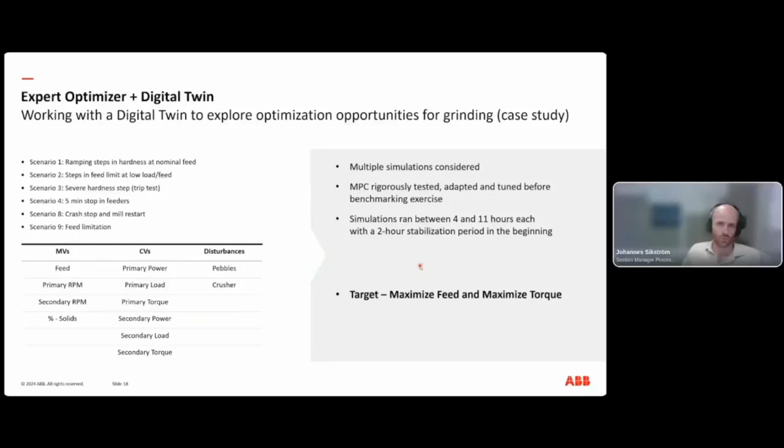Hello everyone, welcome to the ABB Process Performance webinar on Pushing Constraints in Mining with ABB Ability Expert Optimizer. This webinar will focus on the technology of advanced process control and how it brings value in terms of process optimization in the mining industry.

We are also joined by special guest speaker Johannes Sikstrom from Boliden, based in Sweden. He talks about their two recent projects: first, using a digital twin to evaluate advanced process control under multiple operating scenarios on one of their grinding circuits, and then secondly, the on-site implementation of advanced process control and the observed benefits.

Mining is a harsh, changing and challenging environment to optimize. So how can technologies like advanced process control be used to add value? Boliden have collaborated with ABB in such an approach to target the optimization of their grinding circuits in Sweden.

I'll start by going over the basics of advanced process control - in essence, an autopilot for driving the plant to an optimum operating state. With advanced process control, it's seen as a secondary level solution that resides on top of the plant's control system, whether that's a DCS or PLC.

Advanced process control, APC, is an umbrella term in industry which comprises several technologies: model predictive control, fuzzy logic, and inferentials used to predict states in the process. I'll talk about these in the following slide.

Basically, it's an autopilot that manipulates actuators and PID loops in the control system to first stabilize the process. Once the process is stabilized, then shift this process either higher or lower based on the economic optimum for process optimization. So if this is density or particle size, we're looking at stabilizing and then shifting it - if it's density, normally closer to an operating upper limit in a mill to minimize steel-on-steel contact, as an example.

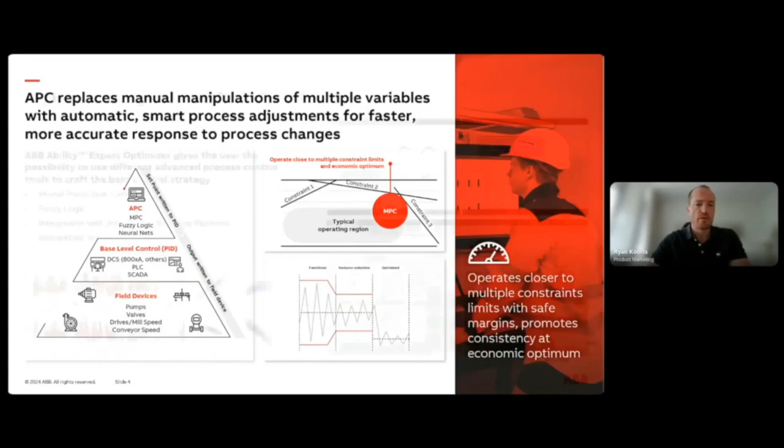When it comes to the different technologies for advanced process control, one of the most common ones would be model predictive control. MPC uses dynamic models obtained empirically from process data, and uses the current state and historic states to predict the future of a particular variable, such as oxygen, pressure, grind size, etc., and then how far away that prediction is from target, and what control actions are required to reduce the delta between target and current value.

MPC is very good at tackling units with challenging dynamics, whether it's systems with large delays or high complexity of interactions with multiple inputs and outputs.

Fuzzy logic is a tool commonly used as well in industry, especially in mining. It's been around for a couple of decades now. It's more of a rule-based approach, easier to understand from an operator perspective, but becomes a bit more challenging when it comes to tuning units with challenging dynamics.

You also have the ability to introduce inferentials into your advanced process control setup, where inferentials are predicting and inferring states of the process in between updates. These states are normally infrequently measured, such as particle size, if it's manually sampled, or density.

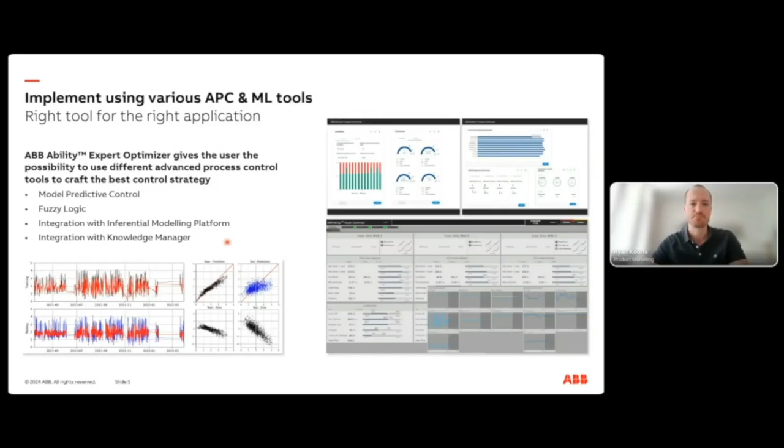One of the challenges when it comes to optimizing minerals processing units, more specifically grinding optimization, would be the instrumentation element. The ability to connect any new device, giving additional information on the process, is critical for progression towards autonomous mining optimization. The idea being that the more eyes we have on the circuit, the easier it will be to drive it to an optimum.

With grinding, one example could be cascade monitoring, which helps to answer questions such as: what's my current shoulder and toe angles within the mill? Am I operating at maximum grinding efficiency? And are my current states causing excess liner wear within the mill? So a solution that provides this information as additional variables can be used and included inside an advanced process control application.

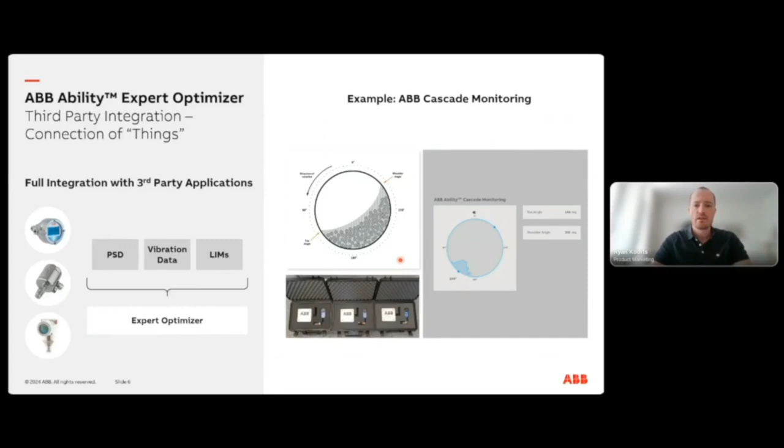When it comes to mining optimization, ABB's been leveraging advanced process control technologies to improve operations from the mine through to the port. If we start at the mine, ventilation on demand utilizes model predictive control to optimize air flows underground, ultimately reducing energy consumption, as air flows underground are highly non-linear and interacting depending on the level underground, as well as slow and complex dynamics.

When we move to the concentrator, we have minerals applications such as grinding, looking to maximize throughput and minimize specific energy. Flotation looks to maximize recovery and minimize reagents. And then with thickeners and clarification, we look to stabilize the bed mass and the underflow density, whether that underflow density is through to leaching or additional fine milling. The underflow density plays an important part, and if that's varying significantly, then your downstream processes will be performing suboptimally.

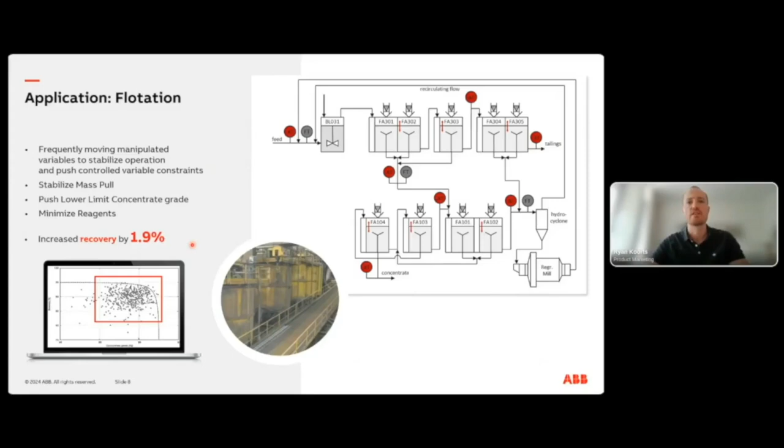By applying advanced process control to flotation, typical benefits would be a 1 to 2% increase in recovery, whilst at the same time reducing the specific consumption of your xanthates, frothers, etc. by 10, 20, 30% in some cases.

Another application would be clarification or thickeners. Thickeners have very slow dynamics, where MPC is very good at handling these types of challenges, as opposed to a human operator with a shorter time frame for attention or concentration. So MPCs can be applied here fairly well, utilizing handles such as flocculant dosing and the underflow drive of your pump, with goals of reducing overdosing of flocculant, maintaining stable underflow density to downstream units, and potentially reducing wear on the rake within the thickener.

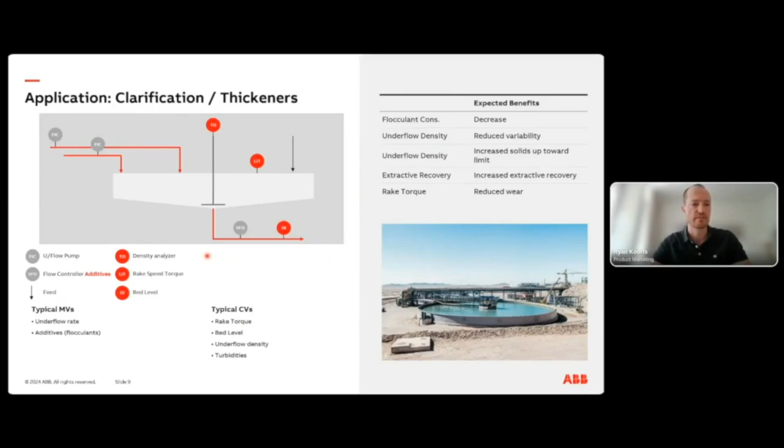So moving on, we are joined by Johannes Sikstrom from Boliden. Johannes is Head of Section Process Control and Analysis at Boliden System Technology, and was heavily involved with both the digital twin evaluation of advanced process control and the on-site implementation of the advanced process control projects. He will discuss both the projects and why they chose advanced process control for increasing grinding performance. This is pre-recorded, so he will jump right into it.

Thank you. I will talk today about a series of projects that we have done together with ABB regarding advanced process control. First, we investigated how we can motivate investment in these kinds of technologies, and then we also implemented it, but I will get into that. The first step of this series of projects was really proving the technology - proving that APC and advanced process control can bring value to Boliden's processes. This was done with simulations.

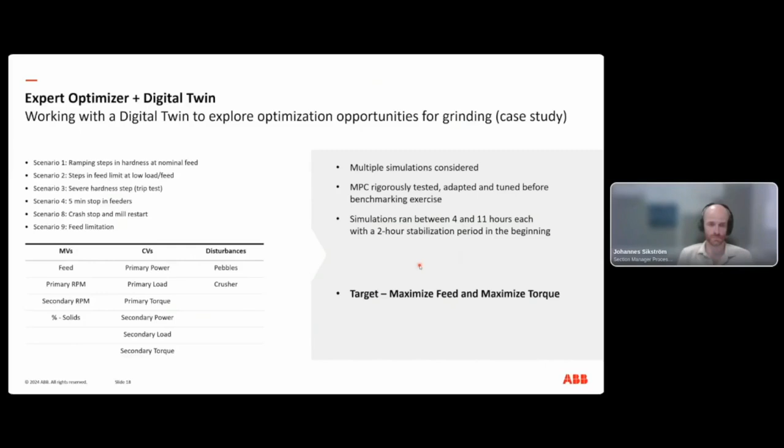Due to this, you need set points for these controllers with a difference between them, and this creates a gap where we can't really get the performance out of it. An APC knows about both the torque and the load, and a lot of other stuff, at the same time, and can balance them all to the optimum instead of these interactions being a problem.

This is one of the main reasons we saw that, even though our PID strategy is quite good performing already, due to these limitations in the technology itself, we were not able to really get that last bit of performance. That's one of the main reasons we were interested in moving to advanced process control.

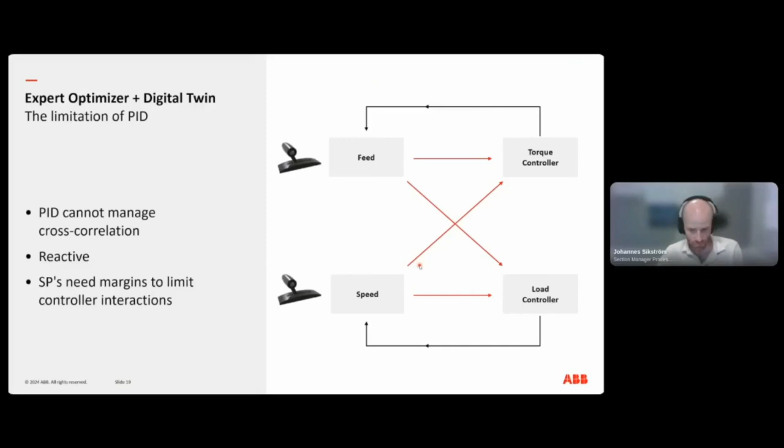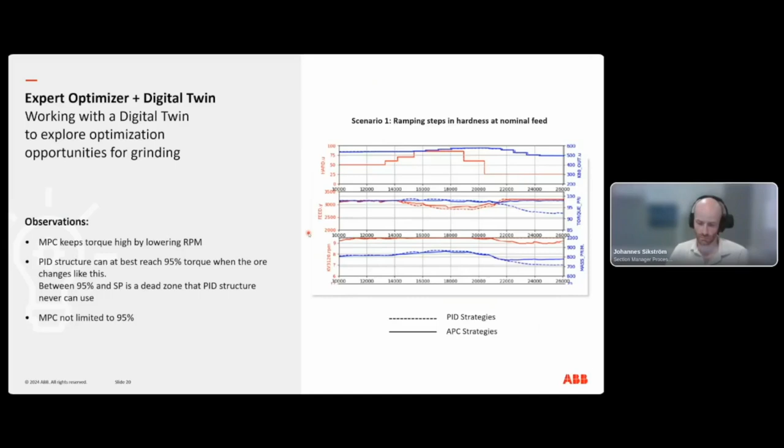Here we can see in the benchmark that it works like we hoped, let's say. And one more case.

I'm not going to go through all of these scenarios, but you get the idea. There were some scenarios, like a short stop of 5 to 10 minutes, where the APC was pretty similar to the PID - it wasn't better, but it wasn't worse. But these were the big ones where we saw it could really use more of the installed power.

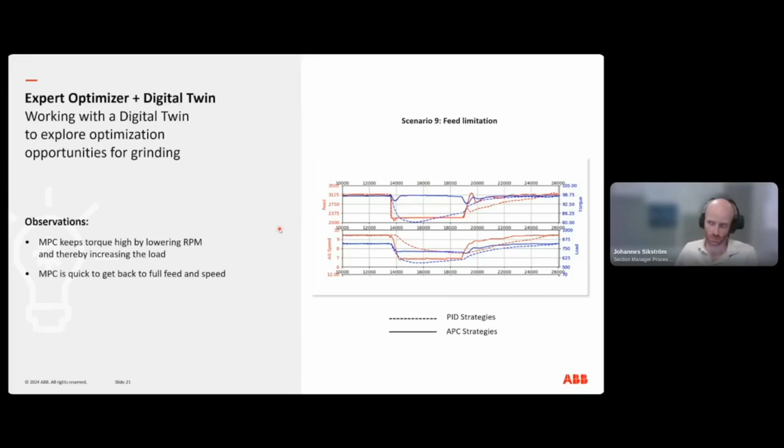And so in summary, we saw that it could handle the cross correlation of variables and better utilize the torque. We also saw that it had a bit higher throughput because it was faster to get the throughput back up after it had been reduced.

And the last point here is quite important as well, because in a PID, you typically don't have any constraints management. The PID doesn't know about constraints, it only knows about the value, the set point, and how far it's between them. But since in an APC you can be aware of the constraints and act really aggressively once you are close to an important constraint, we saw that we could potentially have a higher set point in normal operation because the disturbance reaction was a bit stronger to act once it was really needed.

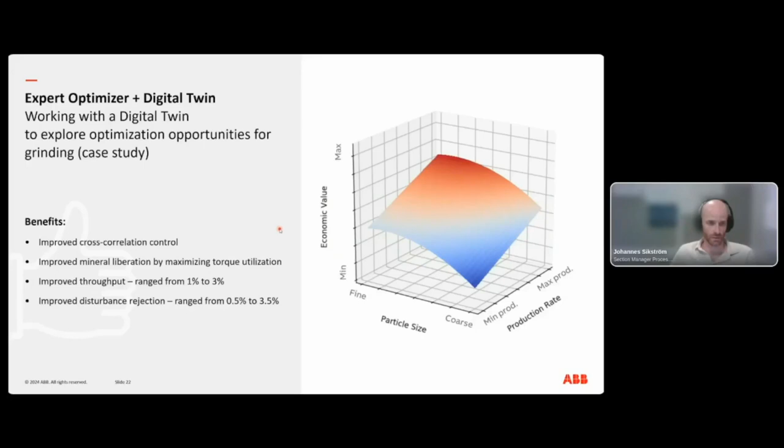So we were really happy with this and presented it to our sites, and Garpenberg, one of our sites in Sweden, in the middle part of Sweden, was interested in moving forward with the implementation, which we then did.

And Garpenberg, there has been mining there for a really, really long time, from 400 BC. So it's an old mining region, and it's a mixed ore, but the main value comes from zinc and silver.

And they have a grinding circuit with 2 AG mills, one 5 megawatt primary mill and one 2.5 secondary mill.

Like I said before, the ultimate goal is to maximize the liberation, to have a good recovery. And we do that by having a high power utilization. But we want to achieve that utilization through a high feed or high throughput, of course. Stability downstream, so the stability in flotation, is also a very important part in this.

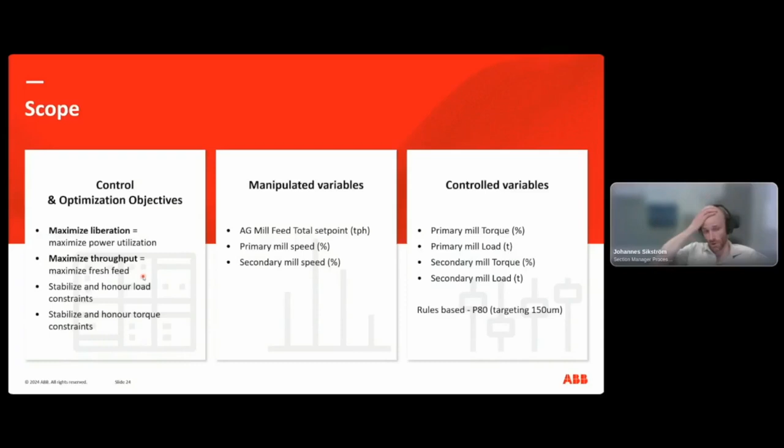And we know that MPC has this predictive capability to look ahead, and that can bring additional stability because it doesn't need to violently react, but it can predict and think ahead a bit, which is good. And of course, constraints both on the torque load and some other constraints.

What we're manipulating is the set point for the feed, and then the speed of both the primary and secondary mill. We also have a pebble gate which feeds pebbles to the secondary mill, but that is currently operating at 100% almost all the time, so it's not really something we control that much.

But if the torque gets too high, the gate can be stopped or reduced. We actually left that to the normal PID controller, so that was not included in the APC because there really was no need.

But we were controlling the torque and the load of both mills, and we also have size distribution measurements for what is going to flotation that we are interested in keeping in a certain range due to the paste backfill production. They have some quality demands there that we have some rules that go in and help us maintain that range.

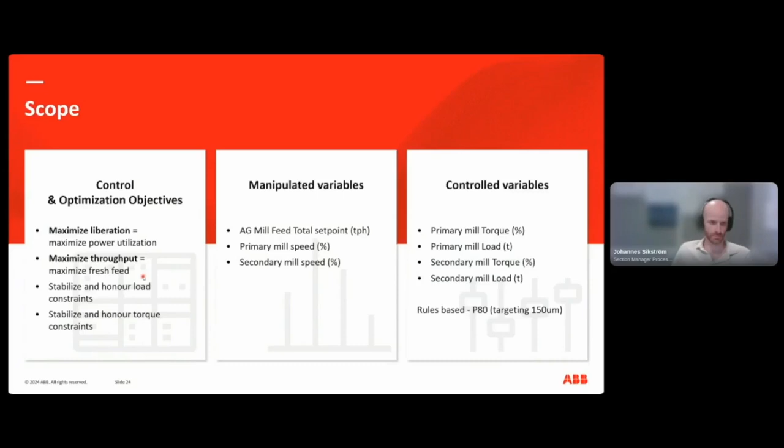So what did we end up building then? It became a bit of a hybrid in the end. It was very difficult to get everything into a single MPC control model. Particularly the speed was difficult to describe fully in a linear model.

So we have an MPC part covering the feed to torque relation, and then we have some fuzzy logic for the speed part. We also built a load target adaptation, we call it that, but it's basically something that...

...continuously calculates what the load target should be and adapts that over time. And that's really to get a good stable process. If the load target were to go all over the place, that could cause some disturbances. So we wanted it to be really stable and slowly going where it needs to go to not introduce any issues for flotation. The load target adaptation has worked really well.

And of course, we have a lot of checks and controls on everything. So we have ready states for stuff that needs to be in the right mode for it to be able to run.

When we started the on-site implementation, we had a pretty good model already from the R&D project where we did the simulation model. So we had a pretty good starting point, but still, of course, it needed to be tuned.

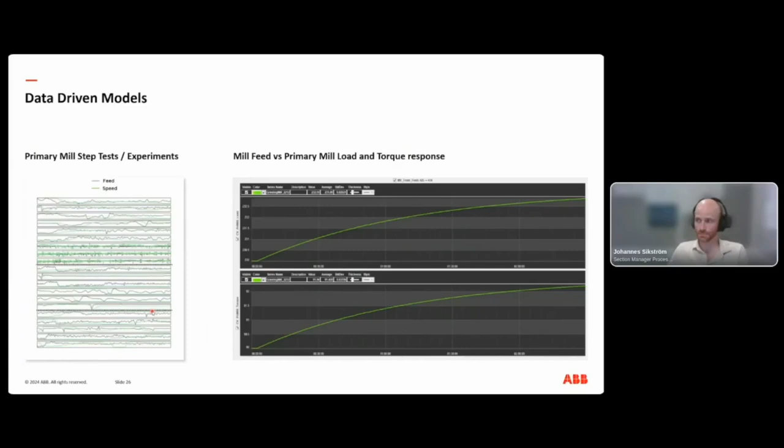What we did was set up some communication variables between the set points and the settings that they normally set for the regular control that we had before. And then we pulled those into the APC, so they are used there as well.

I think this was really good for making it an easier transition for the operators, because they are familiar with this way of working with setting the parameters here and seeing what's going on. So this made it a smaller step for them to change to using the APC, because I mean, they are curious.

They want to understand how it works. How do we interact with it? And I think that was a bit of a success factor, that we were able to make a very small change in the way they work. But the change was more in the controller, which they don't really see.

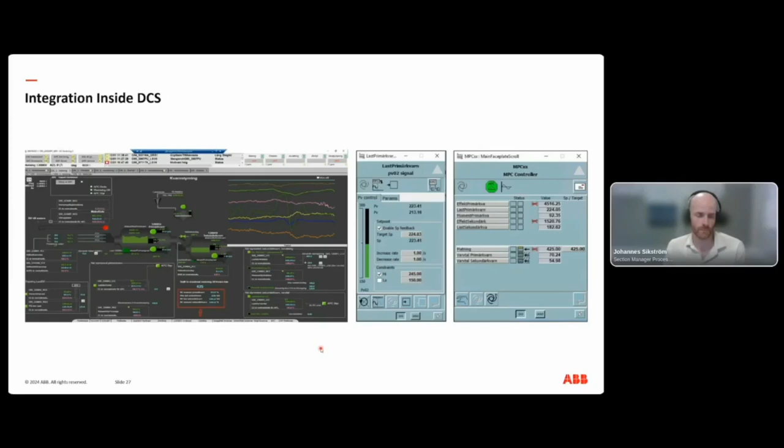So what were the benefits that we have been seeing for this? This has been running in production now for, well, a year or so, I would say now. And we have been seeing this better utilization of installed power that we talked about basically all the way through my presentation here, because that's the main thing we wanted, and we have seen that.

It can use the speed of the mill in the entire range of the process and the production, so to say, to keep the load high, even if there is a limited amount of ore for some reason. So we have seen a higher power utilization.

An additional thing that wasn't really a main goal in the beginning, but we've noticed later, is that we can have higher throughput for longer periods, also due to the ability to control the speed. So if the feed is maxed out against the limit for how much feed we can provide...

...then the old control would use the feed. If there was a peak in the torque, it would reduce the feed to get the torque down. But now the control can use the speed instead, and that way we can maintain that high feed for longer periods without needing to reduce it. So we've seen an increased ability to keep a high throughput as well.

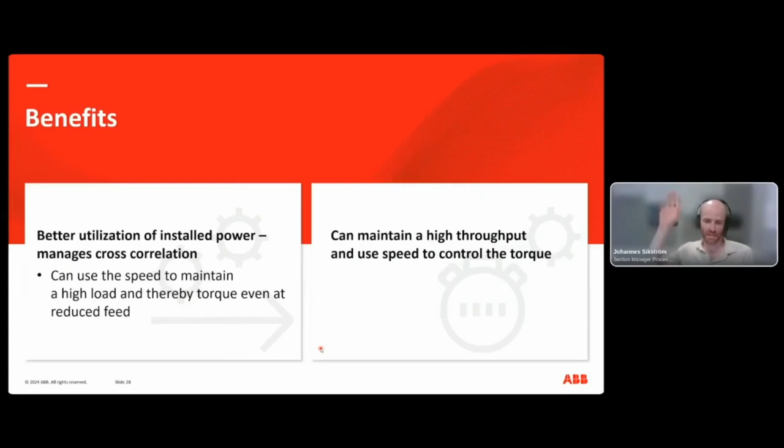So in closing, advanced process control is a powerful tool for increasing processing performance on most major units on mining concentrators. It is a proven technology and is capable of handling multiple operating scenarios. And like most technologies, ongoing maintenance is critical. So having on-site champions or trained operators is critical for sustaining the benefits, and APC can significantly reduce operator workload for maintaining units close to operating constraints, allowing them to focus on other tasks.